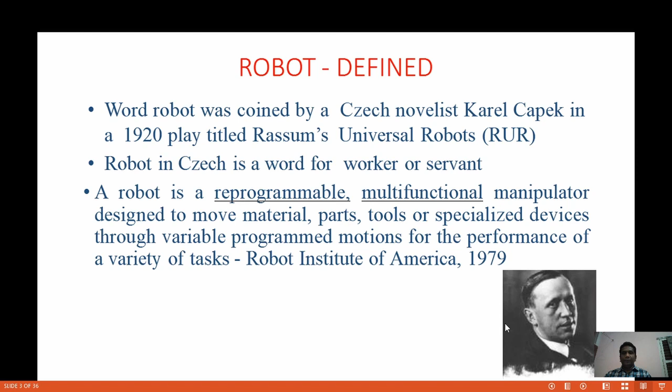This is a basic introduction of a robo. That figure you are seeing is the Czech novelist Karel Čapek.

Asimov, in the 1940s, proposed some laws for robotics, in the sense that a robo designed by humans should not harm the human, should not injure the human, should coexist with humans, and also obeys the instruction of the human being, and should also protect its own existence. Based on these laws of robotics, up to now robos are designed. So Asimov, you can call him one of the fathers or founders of this robotic field. He gave a great propelling force forward for this field.

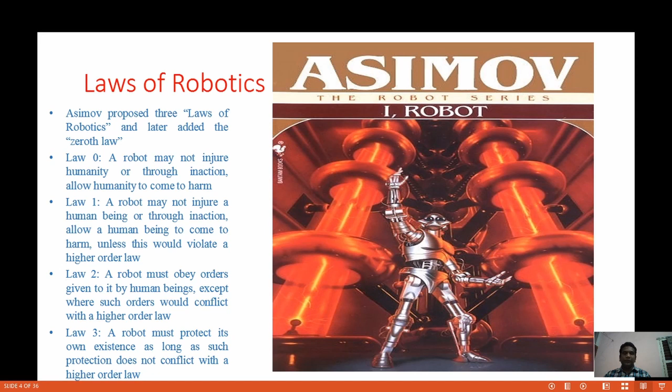We will be talking about the subsystems, or what are all the integral parts of a robo. Basically, Robo Subsystems consist of motion, recognition, and control. Motion is related with movement, as you can see, the motion subsystem. Recognition is to identify objects, and then control is based upon controlling the motion based upon recognition. So motion subsystem, recognition subsystem, and control subsystem. Broadly, we can classify robos into these three basic subsystems.

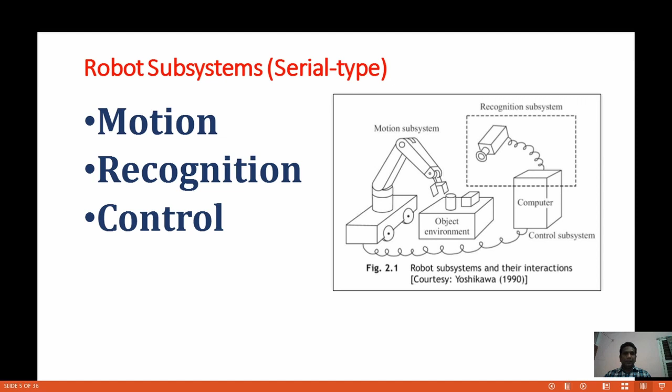In the motion subsystem, we have a manipulator, which is a mechanical arm plus wrist. It is used to manipulate materials without physical contact. It does many functions simultaneously, multifunctional, or performs various tasks. That is what we call a manipulator.

The end effector is a part of a robot that interacts with the environment. For example, a robotic hand gripping a torch, a welding torch, a painting brush, or to remove tools - that and all we can consider as an end effector.

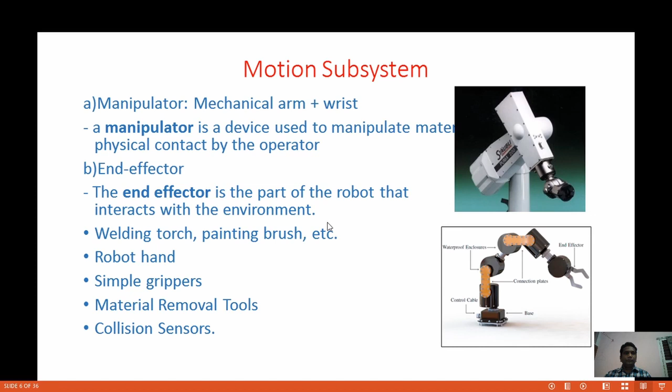The next part is the actuator. The actuator is the muscle of the robot because it converts energy, especially electrical, into physical motion. It may be pneumatic, hydraulic, or electric. Basically it is a DC motor, a servo motor, or various types of motors that give power to the arms to perform a particular task, that give power to the robot to walk, to do any actions. So that part is the actuator, what we call the muscle, because muscle gives us strength, isn't it?

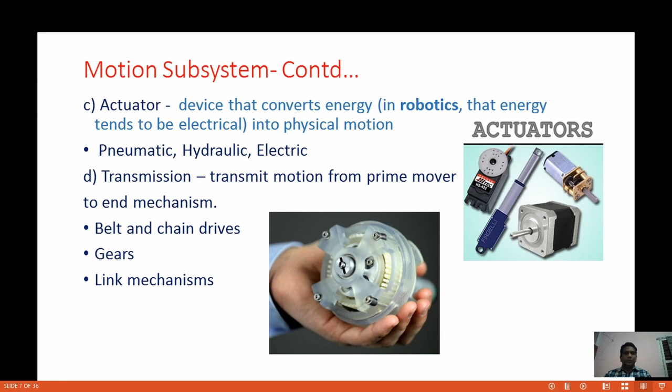The next one is the transmission part. It transmits motion from the prime mover. This muscle, this power, makes the arms do a certain task, like rotation of the wrist. For that, if we design a robotic arm, we need some gears, or we need some belt or chain drives, or some link mechanism. So that part is the transmission part.

The next one is sensors, which comes under the recognition subsystem. So recognition - face recognition, sound recognition, temperature, contact sensor, proximity, distance, pressure, tilt sensor - all this comes under the recognition subsystem. Basically, the recognition subsystem consists of transducers, analog to digital converters, and other electronic devices. This all comes under recognition subsystem.

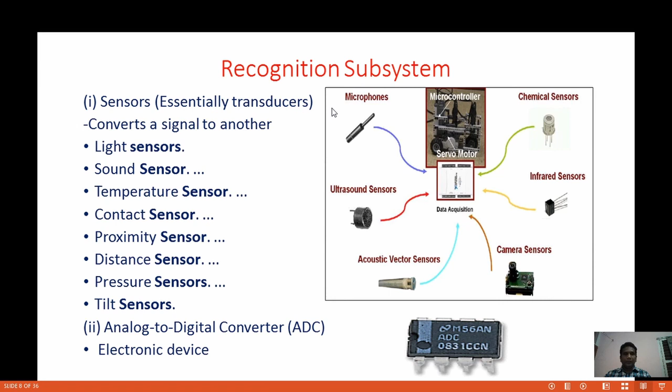The next one is control subsystems. So for controlling, for example, a central processing unit, memory, hard disk to store programs. If we talk from a practical aspect, an Arduino board which has a memory, a processor, and a basic embedded kit through which we can store programs, a ROM, and also interfaces, digital to analog converters, and amplifiers - these are all the controlling parts of a robo subsystem. So broadly, robos are classified into motion, control subsystems, and recognition subsystems.

Next we will talk about the classification of robots. Based upon n number of applications, robots are classified. First we will talk about the industrial classification, which is very wide, and then we will talk about non-industrial purposes. For industrial classification, the definition is: it is an automatically controlled and reprogrammable, multi-purpose manipulator, programmable in 3 or more axes, and it can be fixed or mobile.

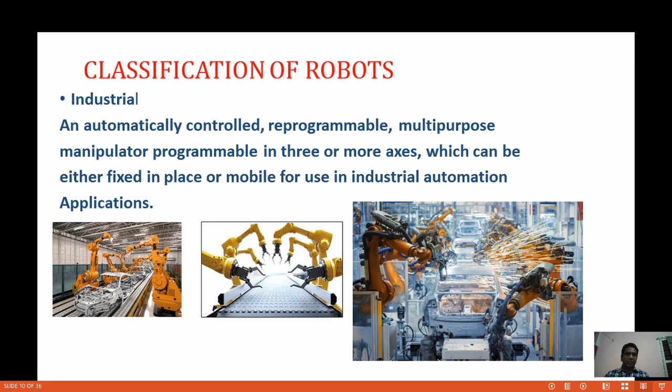Next we talk about some non-industrial applications also, non-industrial or special purpose applications. First we will talk about medical, because the field of robotics inside medicine is something vast and extraordinary, and offers more benefits for the human community.

Next one is the germ-zapping robot. This type of robot nowadays finds enormous application in this COVID-19 scenario, especially for cleaning ICU beds and hospital premises. It will minimize the impact on healthcare workers also.

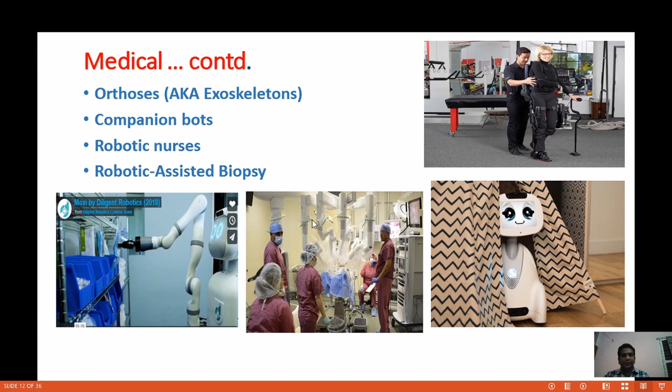The next classification is based upon space exploration. Robots find extensive use in space. For example, NASA, when it launched the Mars rover, that is a robot, and now NASA is in the process of making another robot to be launched. So most land rovers are robots only. They take measurements for astronauts, collect samples, assemble and fix equipment, and in the International Space Station, robots are there to fix all problems in the space station. So such is the foray of robotics into the field of space.

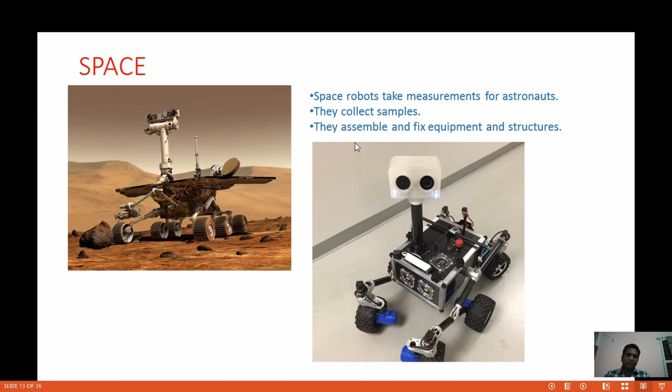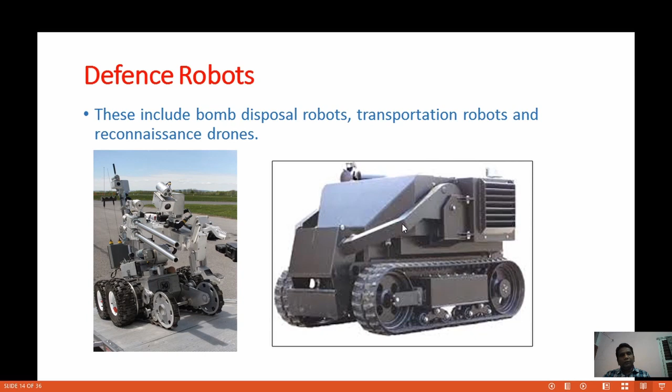Next are defense robots. There are n number of defense robots, but what I have put here is something very new. One is a bomb disposal robot, shown on the left side. This robot is used by the United States to dispose of bombs as well as to catch people who are troublesome, suspects, or terrorists. These robots are extensively used. Another one is transportation robots, shown in this picture, which can carry heavy military equipment in dangerous terrains. It's not possible for a soldier to carry it, or for armored vehicles to go there, so these sorts of robots can be used. Apart from that, there are a number of other defense robots.

The next one is robots used for security - surveillance, unmanned aerial vehicles for power surveillance in power generating plants, oil refineries, which are a threat from terrorists, or to monitor borders. We can have this sort of robots.

The next one is robots for domestic purposes, in the home. There are many robots, especially robots for making rotis, robots for making dosa, and robots for vacuum cleaning. One is Roomba - a highly autonomous robot where you can suck the dust, and also wet the floor using this Roomba vacuum cleaner. It will go underneath sofas, into the corners, and clean like a professional. Robots are also used to clean toilets.

One robot is the Scrubmate - that sort of robots are there. And what you are seeing here is Lovot, one of the recent robots for domestic purposes. It is actually a friend and domestic assistant. Usually people who are very old and staying at home alone have this robot as a friend, where it gives a calming, comforting, therapeutic presence, reminds the person to take their tablets, and is somewhat talkative and interactive. It's something fun to play with also for people who are very lonely at home. So this type of robot comes under the domestic category.

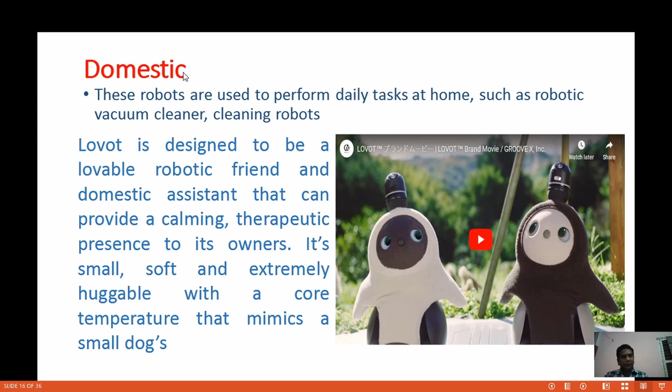The next classification is by degrees of freedom, which comes under industrial robots. Degrees of freedom means how a robotic arm can move in different directions - it represents location as well as orientation. This sort of robotic arm is basically pick and place - you pick an object and place it in another location. For example, in an industry, if we have to take a product or part from one assembly line and place it into the next assembly line, we can have this sort of robot.

Mainly in the manufacturing process, it's a common scenario where parts come in at one portion and have to be shifted into the next conveyor belt for the forthcoming process. Degrees of freedom - as you can see in the first diagram, there is a waist rotation, a shoulder rotation, an elbow rotation, a wrist rotation, and a gripper rotation. So here we can see about 5 degrees of freedom, basically 5 joints. If we take our own arm - we have a shoulder that rotates, an elbow that rotates, a wrist that rotates, and our fingers also rotate. These movements represent orientation - how we take an object and place an object.

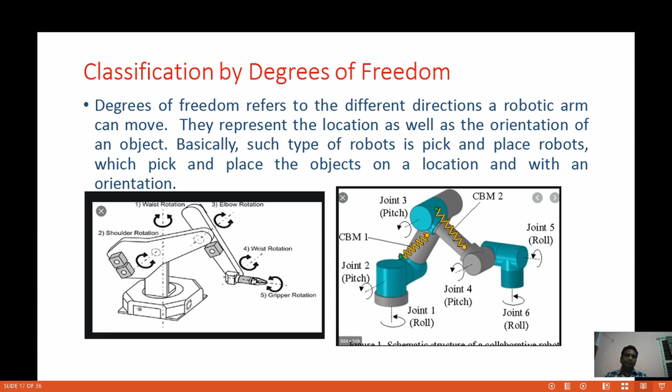The next classification is by kinematic structure. The word kinematics basically refers to coordinate systems. There are different types based upon this kinematics. One is Cartesian, meaning when the arms of a robot move in x, y, z coordinates, we call that a Cartesian robot. So you see there an x-axis, y-axis, and a z-axis. This sort of robot is one type.

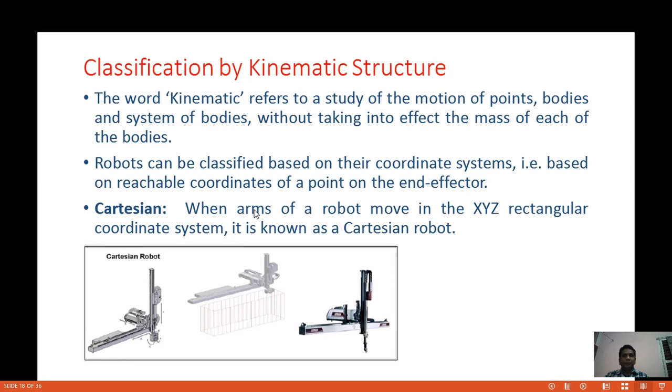The second type of robot based upon this kinematics is the cylindrical robot. This robot has one basic rotation, so it rotates; one elevation, so it lifts up; and one reach, so it places and picks the object or puts it in some place. So what you are seeing is a robot of a cylindrical nature which is used in welding.

That's the figure. The next one is spherical. Similar to the cylindrical robot, it also does that. It has a base rotation, an angular elevation in a particular degree, and then a reach. So it puts the object in a 30-degree reach, or it elevates itself 30 degrees and places it there. That's the spherical environment.

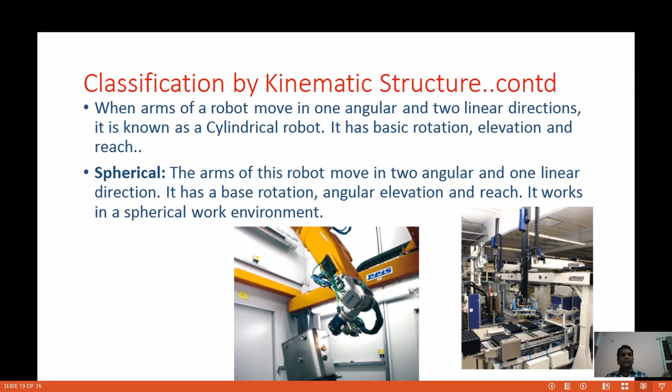Another classification, and one of the most important classifications based on kinematic structure, is SCARA, Selective Compliance Assembly Robot Arm. The example for SCARA is palletizing. This SCARA has two parallel revolute joints, meaning it provides a flexible behavior in response to external forces. In mechanical applications, palletizing is one aspect you can see in the assembly line.

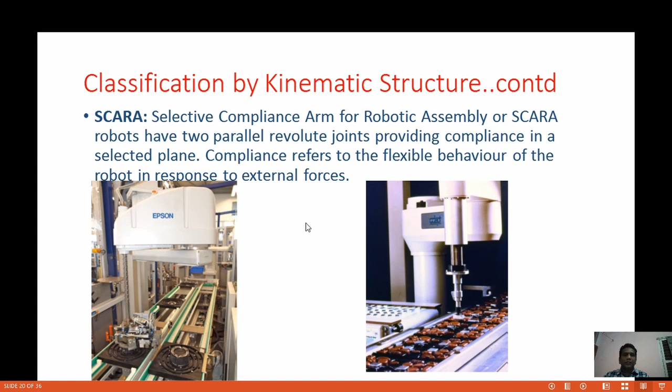The next type is classification by movement. One is a fixed one, it moves within certain degrees of freedom. Another one is mobile, it's not fixed, it moves over the surface. When we talk about mobile, there are either legged robots or wheeled robots. The first one you are seeing here is a wheeled robot, single wheel, its name is Seiko from Japan.

The next one is a four-wheeled robot used by NASA for space. Then we are seeing a three-legged robot, which is also a mobile robot. And then we are talking about a six-legged hexapod structure. This one can carry weight; we can use it to carry heavy equipment or machinery to other places, or from one workshop or floor to the next.

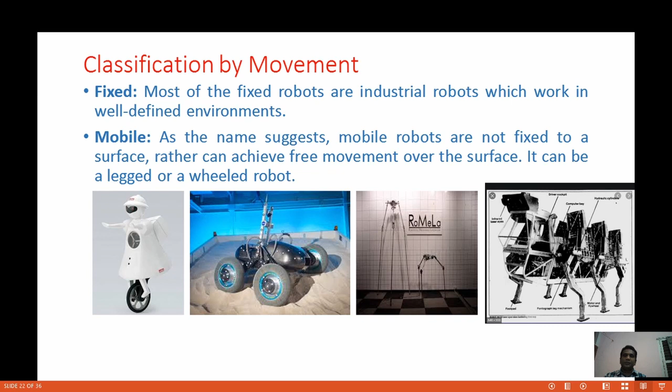Robots based upon movement - this list is quite exhaustive. We can also categorize robots used especially in water, underwater. One that recently shot to fame in 2019 was an Aquanaut, invented by NASA in their labs. It's an unmanned underwater vehicle. When you see this, it looks like a robot underneath, but it will transform just like a submarine also.

It travels and fixes faults in oil and gas undersea infrastructure and cables. It fixes the valves there, and it can use tools to do all these things. This one is a very recent innovation. And then the other one, the yellow color one you are seeing, is a Liquid Robotics wave glider used in the Pacific Ocean to study ocean exploration. These types of robots are used.

You will be quite astonished to hear this robot has traveled 17,000 kilometers in the Pacific Ocean to study the ocean. This is currently in use and extensively used by the Ocean Department.

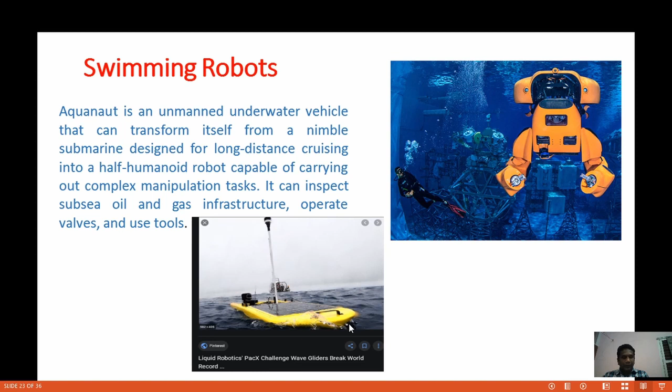Okay, the next type is basically all related with our human nature, humanoid robots. When we talk about the growth of robotics, at present robots plus artificial intelligence have joined together, resulting in this humanoid type of robots.

One of the best is ASIMO, a humanoid robot invented by Honda company. It will run, it will dance, it will even kick a soccer ball. If you command, it will fetch you a glass of water. It will help elderly people. This sort of robot is very widely popular.

Another one is AILA, a humanoid robot used by researchers. These are all latest technologies. It has artificial intelligence and robot perception, it perceives things.

You may have seen on the web, Sophia, a humanoid robot used for news reading. This Sophia can also interact with humans. It has a very good memory. If you Google, you can see Sophia interacting with a person 6-7 months back, and it still remembers the person when it meets again.

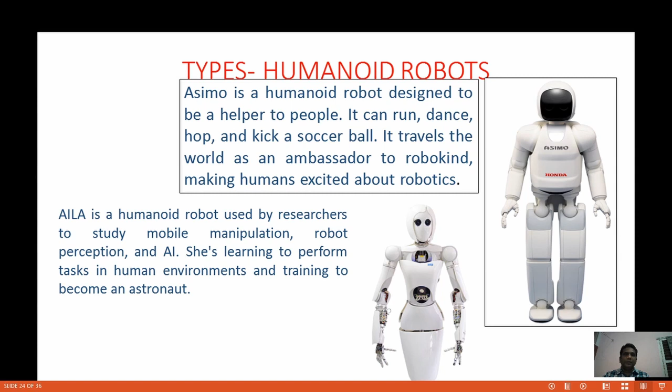The next one is telepresence. Usually when people work in remote places, lonely, they quite often feel isolated. This telepresence robot has autonomous mobility with video conferencing, and it helps workers to stay motivated, engaging them in talk as if more than two people are working, taking away the lonely thought from the concerned worker.

So Ava is a telepresence robot. This is a recent robot. There are many telepresence robots, but this is a very recent one widely used.

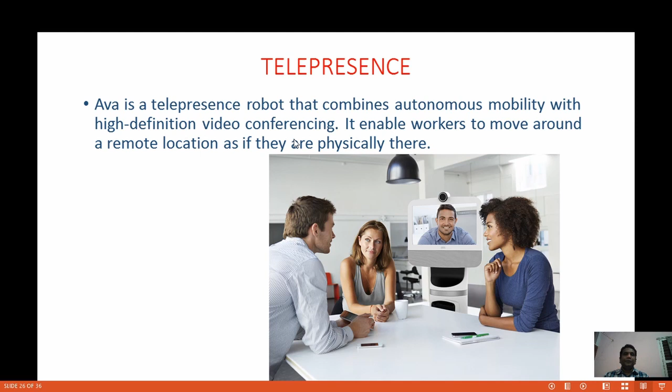The next one, robots in the field of education. There are many robots extensively used - for example, robots are used to make students learn alphabets, learn how to draw, how to pronounce, how to learn languages, how to identify objects, everything.

The next thing, robots in the field of disaster response. There are many robots used, especially during earthquakes. We can see that even if a child fell in a borewell, you can rescue the child using a robot.

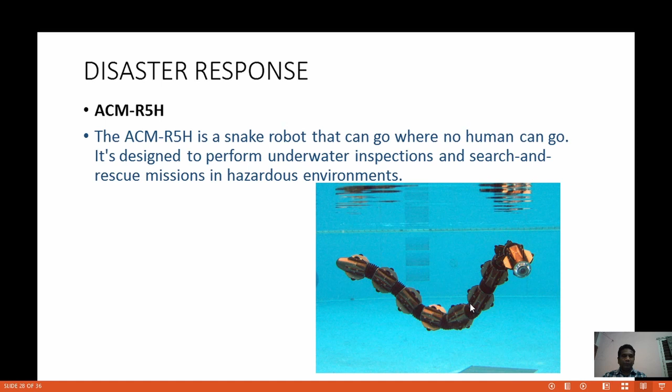So the next one is Robotics - the recent trends.

We have seen about the different classification of robots. Now we will be talking about the current scenario, the recent technologies. We will see some recent trends that will astonish you.

One thing is artificial muscles. We found out that actuators are motors that give power to the robot. Imagine a robot having a muscle like us, based upon carbon nanotubes. These artificial muscles will sense just like a human. Suppose if someone touches us, we know whether they are touching in a friendly manner or with some other intention. This artificial muscle can sense just like that.

The next one is elastic electric cable, shown here in this diagram. When we design a robot, there are many electrical wires connected between parts, and sometimes these wires are really stretched. Imagine an electrical cable that is elastic - however much you stretch it, the cable will stretch too. This is very important in the design of robotic arms, in constituting various degrees of freedom. This electric cable is a boon in that area.

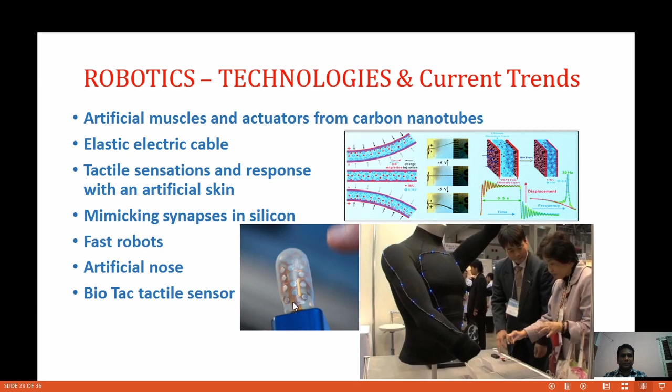These are all the recent technological trends in the making of a robot.

The next part is when we try to start building a robot. One thing is we go and take an Arduino board with a Raspberry Pi board with an ARM processor kit, and start building a robot. We write a program - such software is freely available on the internet. Then we dump it in a chip, and you can use it for your purpose.

But for the design aspect - shaping the arms and making the movements - there are good robotic softwares used in industries to manufacture robots. I will list out some robotic softwares. You can just Google them and find out how far each is suitable for your nature of work.

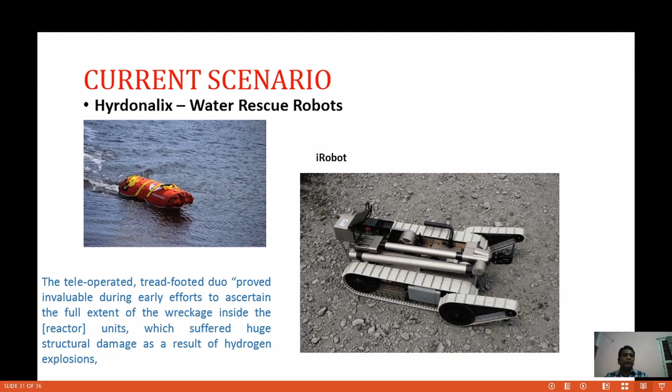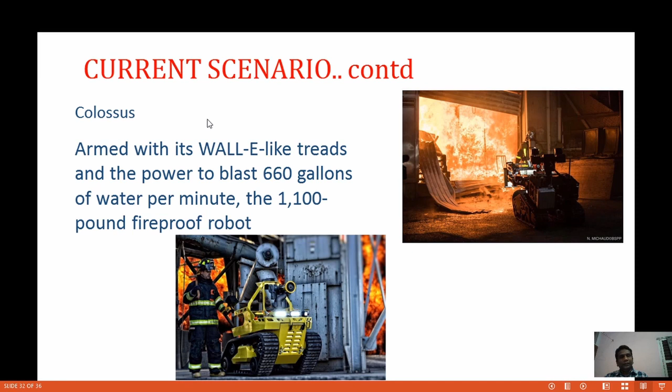These sorts of robots are extensively used in the current scenario. Another thing in terms of security and rescue operations is the aerial rescue robot.

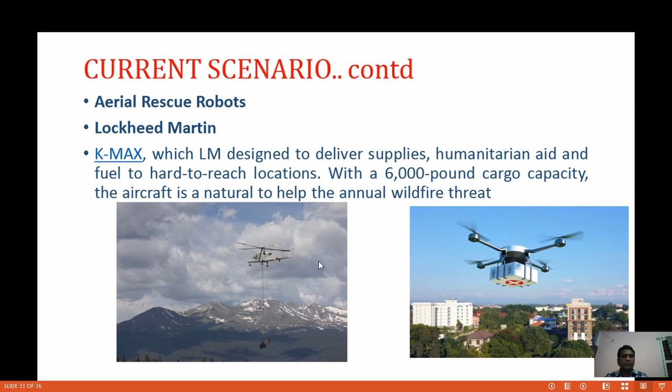Another one is K-MAX. It delivers supplies, humanitarian aid, and fuel to hard-to-reach locations. In some African countries, they use robots to deliver medicines to remote places that are not otherwise accessible. This technology has existed for some years, and these are all recent improvements people have made.

Next, we'll discuss how to make a career in robotics. As a student, you can take a career in electrical engineering, mechanical engineering, computer science engineering, or mathematics.

Why mathematics? Because the movement of robotic arms, the motion, everything is related to mathematics - Cartesian coordinates, time, distance, all of it. If you're a mathematics graduate with a PG degree, you can have a career in mathematics too, as well as in design and technology or product design, where you can design the robot itself.

An electrical engineer works on actuators, converting electrical energy into power - the muscle of the robot. A mechanical engineer handles the design aspect: what type of movements it should have, the Cartesian coordinates, whether it's an articulated robot or a SCARA type, and how many degrees of freedom it needs. Computer science engineers handle computing and programming - what software to use and how to load it onto the appropriate board.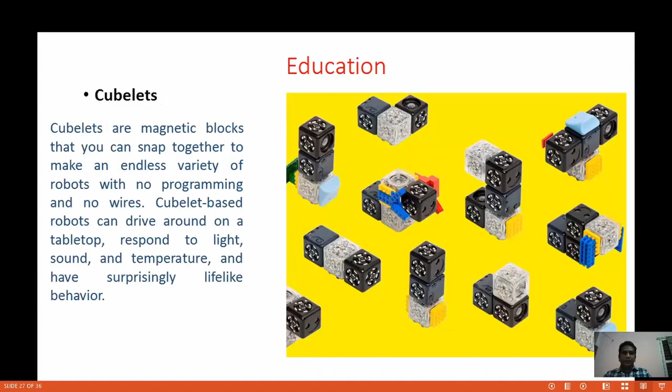Say for example, if you are into gardening, every time you start, you would ask your brother or sister or father, bring that tool, I'm going to do this. But this robot can be used as a companion, so that it goes and fetches the things you require.

Okay, so robos for sale, robos for rent.

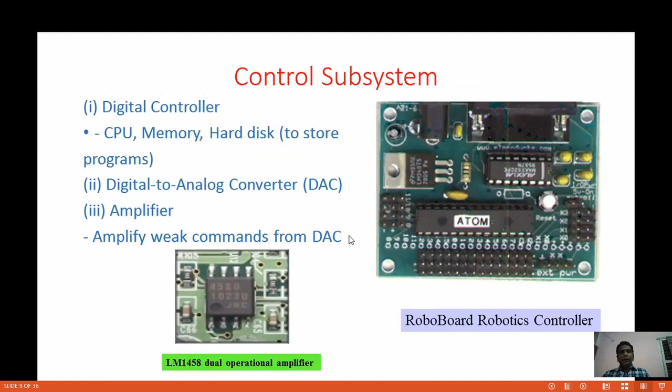Lastly, this field of robotics is developing at a very fast pace, day by day. What is happening today will become obsolete within the next two, three, or a few months. In some countries it's getting obsolete, in some countries the technology is just coming. Such is the field of robotics.